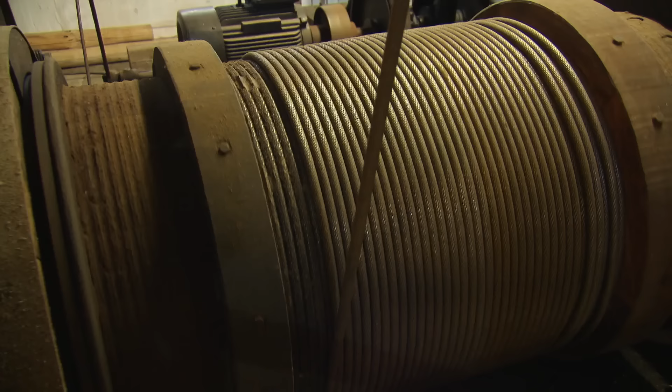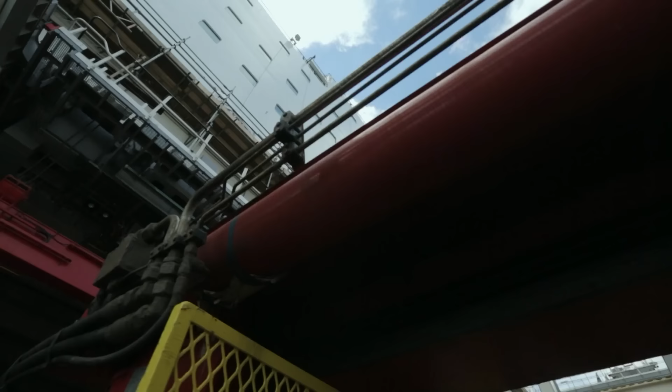In this episode, the world's biggest ship. We're the widest, we're the heaviest, we're also the longest vessel in the world. Built to be the most powerful lifting machine on the planet. Pioneering Spirit can do things that other vessels can't do. Made possible by a raft of cutting-edge inventions.

It's surprisingly strong, even though we know it's made of tissue paper. What an amazing machine, incredible. History meets high-tech to make the impossible possible.

The offshore oil industry is at a critical turning point. Many shallow water oil fields are drying up, and between now and 2050, many hundreds of rigs will be scrapped. In the old days, nobody thought of removing a platform, but the idea was to keep it at sea for years. Nowadays, from an environmental point of view, platforms have to be decommissioned.

Standard oil rigs consist of a steel base fixed to the sea floor. This supports the giant topside, holding the drill rig and the processing plant, which can alone weigh over 40,000 tons. Site coordinator Dan Ackerboom knows dismantling these metal giants is far from easy.

The conventional method always was with cranes on a big barge. Removing a platform in the old-fashioned way has a lot of disadvantages. It's mainly because you're offshore for a long time. It's a lot of lifting, and lifting is always a risk, especially at sea.

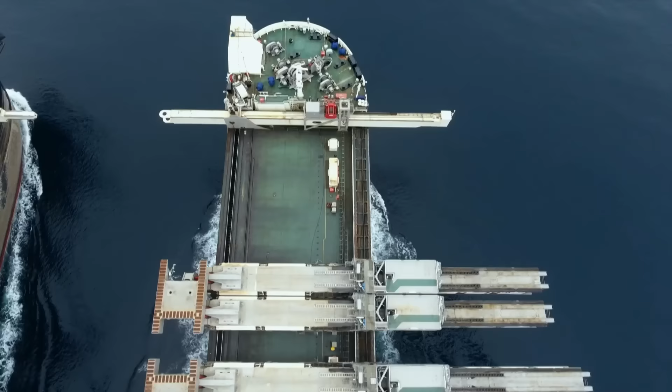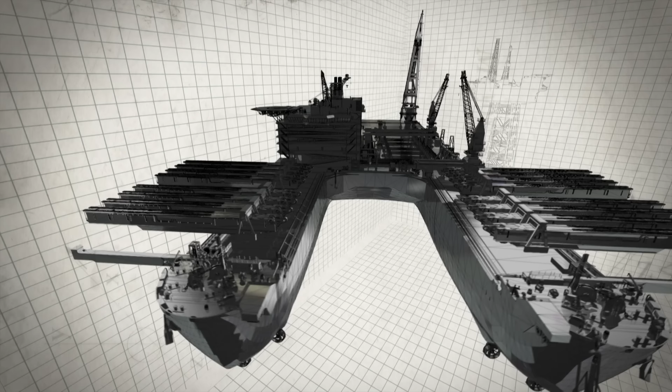And in August 2016, what offshore construction engineers came up with is the Pioneering Spirit. For Vice President of Innovations Andre Steenhuis, this $3 billion multi-purpose megaship will change the industry forever. This idea is quite revolutionary. If you have to do something which you have never done before, it's difficult.

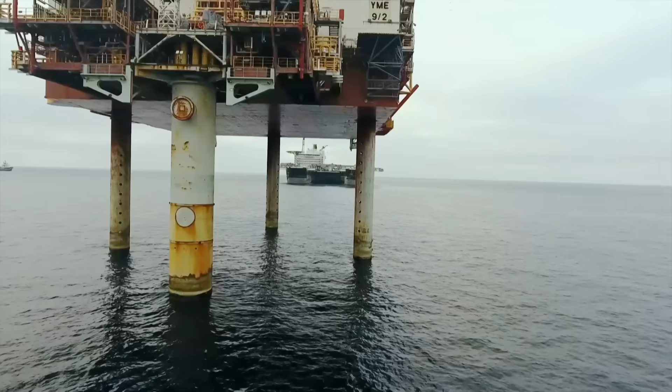Weighing over 900,000 tons at maximum draft, at 124 meters wide and up to 477 meters long with equipment deployed, this steel giant is the biggest vessel on the oceans. Propelled by 12 6,000 kilowatt azimuth thrusters, this multi-purpose ship can install and remove oil platforms and lay pipeline in the world's deepest waters. And its unique dual-bow design, with 8 pairs of lifting beams, each weighing 1,800 tons, enables the ship to straddle an oil platform and pick up a 48,000-ton oil rig topside in one Herculean lift.

Lifting something of such magnitude at sea has never been done before. For the Pioneering Spirit team, the engineering feats required were mind-boggling. It's really challenging, of course. It's something completely new, not been done before.

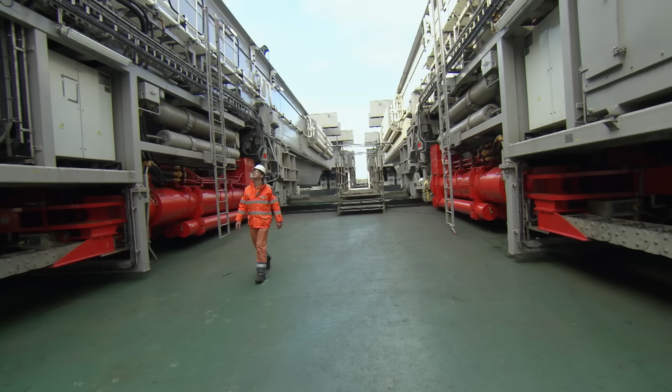But a giant lifting system requires a giant ship. And building a vessel of such great size and complexity provides an unprecedented construction challenge. The size of the vessel already makes it difficult. Almost 200,000 tons of steel you have to produce, weld, install. And on top of that, we also have various complex systems on board, which many yards are not used to.

The length, the water displacement, the width, it is a unique ship. It is bigger than all the other things it did before. So how do you build a megaship of such epic proportions that can pluck an oil rig platform from the sea?

Engineers at Allseas would look to the work of the maritime trailblazers of the past. It seems that, as far as boats are concerned, size has always mattered. And once man had mastered the basics, he was soon building big.

Ptolemy IV of Egypt's warship, the Tessarakonteres, was thought to be the world's largest human-powered vessel. At 130 meters, it was meant to be rowed by 4,000 slaves. But in practice, it wasn't very mobile.

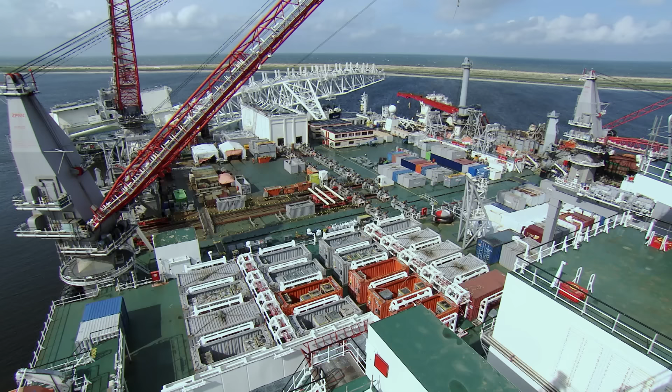Engineers on the pioneering Spirit are taking Kaiser's methods and employing them on a gargantuan scale. Built using the block method at almost 3 times the size of a Liberty ship, it is prefabrication on an unprecedented scale.

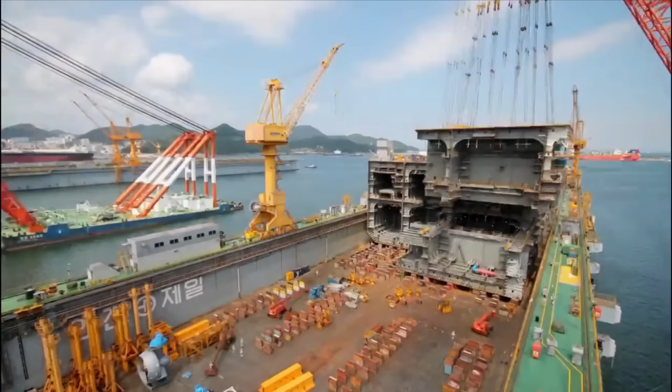A normal ship consists of 60 to 70 big blocks, but this ship almost consists of 1,000 blocks, which were then pre-assembled to pre-erection blocks, and those pre-erection blocks were dropped in a dock, and there they were welded together.

Before sailing to her home port of Rotterdam, Pioneering Spirit is constructed in the Daewoo shipyard in Korea, only one of 4 shipyards big enough for the job. The Korean shipyards are used to building big ships, but this ship was massive.

The ship's unique shape means the prefabrication method can be taken one step further. We didn't build it in one dock. We built the portside hull in a dock and the starboard hull in another floating dock, and eventually brought her together along the quayside.

She's a split hull, how we call it, because she's not really a catamaran. We need to have this shape, otherwise you can't move around different kinds of sizes of topside and connect to the topside.

Even with prefabricated units, the ship is so huge it takes 4 years to build. The amount of man hours, the amount of welding work involved in that was 2 to 3 times as much as they expected.

I have seen 8 vessels leave there, and this vessel was not even finished, basically because of the amount of steel involved. It is not really a vessel, that's what I always think. It's a big working island.

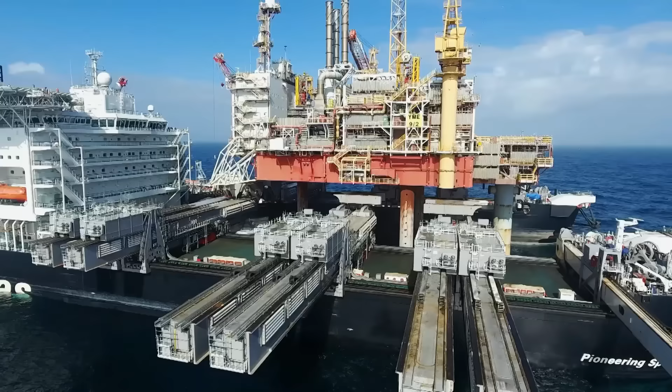Pioneering Spirit's engineers have created a unique ship. But to achieve the ambition of physically lifting a rig from the seas, designers have to draw on yet more innovations from history. It feels a bit like riding on a magic carpet, to make the impossible possible.

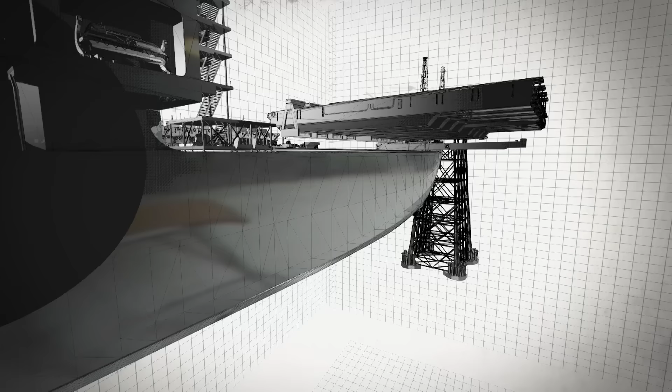Oceanic mega vessel Pioneering Spirit is at the vanguard of the offshore construction industry. Built to salvage rigs in one gigantic lift and lay pipe in the planet's deepest waters, for Vice President of Innovation Andre Steenhuis, this ship is the engineering project of a lifetime.

The capacity of this vessel is quite unique. You've got 1 million tons of displacement. The length and the width are huge. This vessel has completely changed how the traditional industry works.

The ship's unique design means it can pick up an oil rig topside in one epic lift. What we do with this concept is that we don't lift a platform from the top, but we actually push it off from the jacket.

To begin the platform lift, Pioneering Spirit must first lower cutting torches down each leg of the platform in preparation. Then the ship maneuvers into position. But this is not plain sailing. The dual bows must slide under the topside with room to spare.

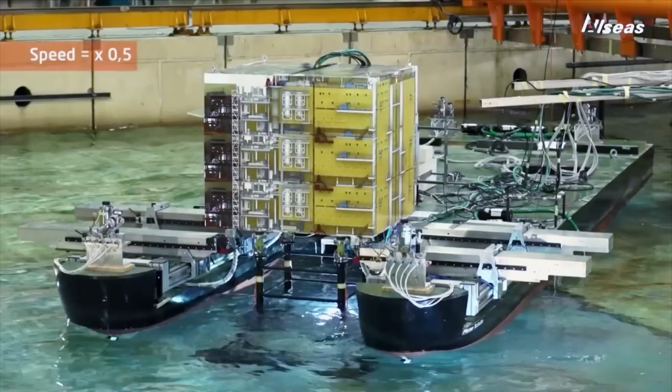We need to be able to increase or decrease the draft of this vessel to make sure we could get underneath a platform, which are all at different heights at sea.

So how do you safely position a 900,000-ton ship under an oil platform in potentially hostile waters? To achieve this, the designers need to draw on the accomplishments of history's great engineering pioneers.

Science journalist Leila Nelipour is traveling across the seas of Central America to a remote Panamanian archipelago to investigate an extraordinary engineering mystery.

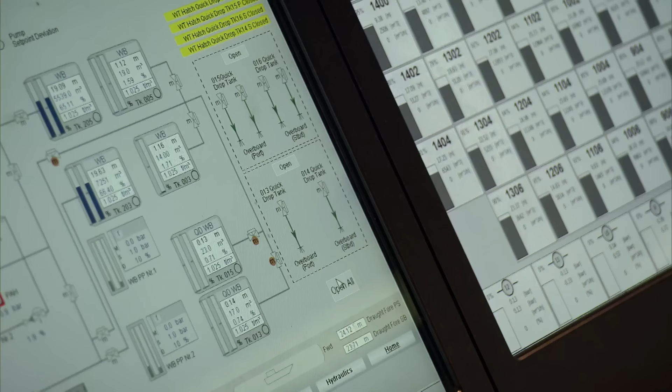Engineers on mega-vessel Pioneering Spirit upscale Kroehl's innovative use of ballast to a whole new level of sophistication. Captain Fred Recto is at the controls. We've got over 87 ballast tanks, of which 4 are quick drop tanks. The biggest single tank is already 15,700 cubic meters, which is normally the size of a big vessel. In total, we can occupy about 750,000 cubic meters of ballast water.

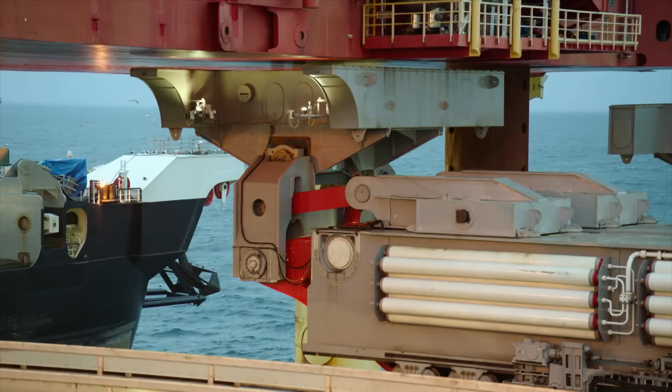To position under the rig at a safe distance, the ship takes on enough ballast to increase its draft a further 17 meters. What we don't want is once the yokes or the beams are close to the platform, that they will hit the platform.

Once in place, Pioneering Spirit can begin the lift process. First, the ship must connect a series of yokes to the platform, but this poses a dangerous problem. You have to be able to compensate for all the vessel motions when you're moving in on the platform. If you don't have that, the collision impact will be enormous and the project will finish.

So how can engineers accurately connect to the rig when the ship is constantly moving? The team on Pioneering Spirit would look to the work of the innovators of the past. This is the Linas-Montlhéry racetrack near Paris.

And this car, driven by Suzy Shi, is one of the cleverest ever built. This is the Citroën DS, a true icon of French motoring. And while she's undoubtedly a thing of absolute beauty, it's actually the engineering underneath the bodywork that makes it truly remarkable.

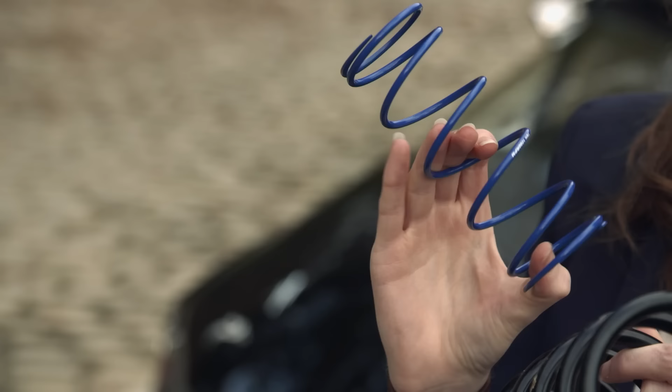And in 1955, that engineer was Citroën employee Paul Magès. His ingenuity would override conventional suspension engineering once and for all.

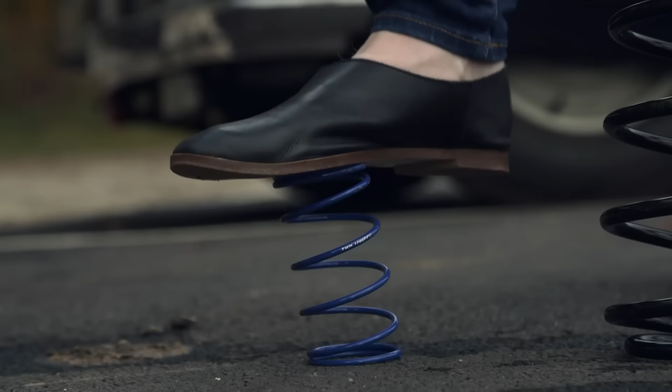Conventional suspension systems are based on springs, but because a spring always maintains the same stiffness regardless of how much you compress it, there's always a compromise to be made in handling. So if I have a soft spring like this one, it's pretty good at absorbing fast bumps and jolts in the road. But when I'm going around corners, the softness means my handling is a little bit compromised.

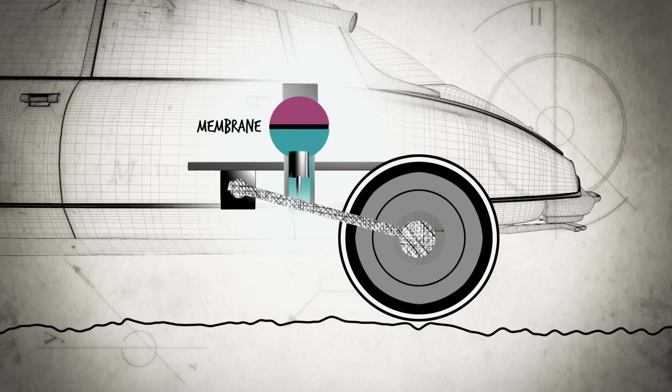If I go, though, instead for a stiffer spring like this big one here, it's not very good at absorbing bumps in the road, but it's much better through corners with handling. So essentially there's a catch-22 here. If you want a really comfy ride, your handling is going to be affected. But if handling is your top priority, then it's not going to be a very comfortable experience.

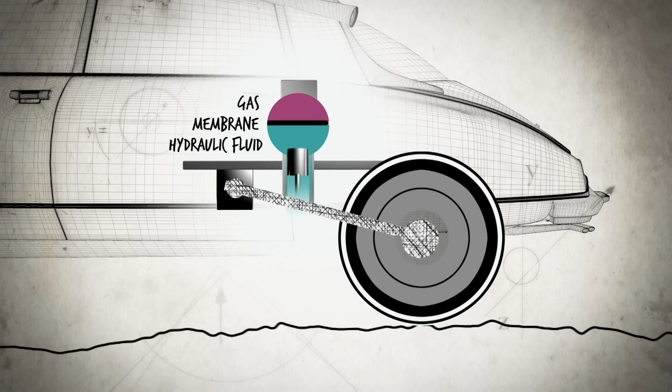Magès took a hugely innovative approach. He got rid of springs altogether. Instead, a sphere is attached to each wheel by a rod and divided by a rubber membrane. The top contains gas, which compresses and absorbs force, and the bottom hydraulic fluid, which transfers it. On impact, the rod pushes into the hydraulic fluid, transferring force to the membrane, compressing the gas above and absorbing the impact. Any excess force is dissipated by pushing the non-compressible hydraulic fluid through a valve.

So we're going to put Magès' design to the test by driving the DS on this incredibly bumpy road. Now, for most cars with a conventional suspension system, this road would be horrendous. It would be really bumpy, really shaky. So let's put the DS to the test and see how she goes.

This is really quite amazing. I mean, driving down this really bumpy road in my car or a normal car, I'd be feeling lots of jolts and bumps, but in this car I can't feel them. Because we're riding on this kind of cushion of air, it seems to absorb all of the sudden shocks and jolts from the road. So I really think Magès' system, it works.

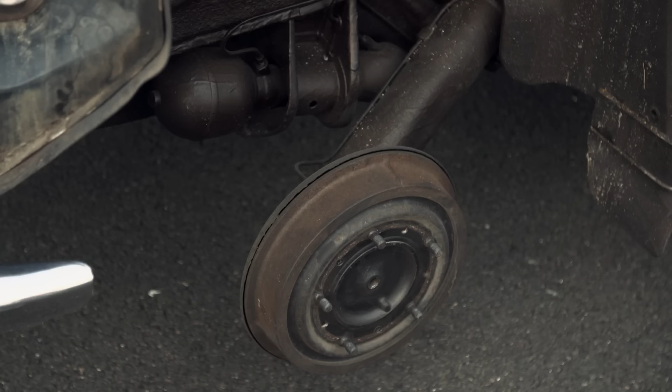Not only can it cope really well with bumps in the road, but it actually has another trick up its sleeve. It has an automatic self-leveling system, so that regardless of how much weight you put in the car or where it's placed, extra hydraulic fluid will be pumped around into the spheres, which will compensate for the weight and bring it back up to its optimal ride height. In fact, the system is so clever that it can even compensate for having a wheel missing. Absolute genius.

The Citroën DS is considered one of the most influential cars of all time. Its hydro-pneumatic suspension system has been employed on everything from Maseratis and Rolls-Royces through to ambulances.

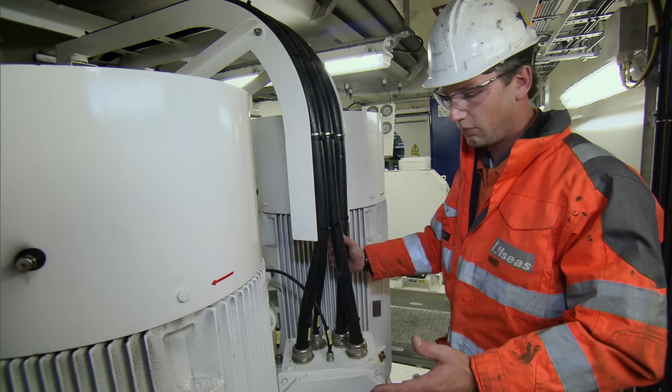Engineers on Pioneering Spirit are employing the same principles as Magès as part of a spectacular stabilizing system. When the vessel is moving around the platform and we switch on to AMC, how we call it active motion compensating.

The topside lift system consists of 16 giant beams, 8 per hull, each weighing 1,800 tons. Each beam houses cylinders containing pressurized air, separated from hydraulic fluid. Similar to Magès' spheres, the air acts as a buffer to dampen the cylinder movements. The combination of the hydraulics and the air system, what we have, that makes it actually a big and giant shock absorber. Yeah?

The hydro-pneumatics work to cushion impact of rough seas. In combination with the entire motion compensation technology, it creates a cutting-edge system. All beams can move in all 3 degrees of freedom, X, Y and Z direction. The key aspect in the whole beam system is all the hydraulics and pneumatics involved to make sure that

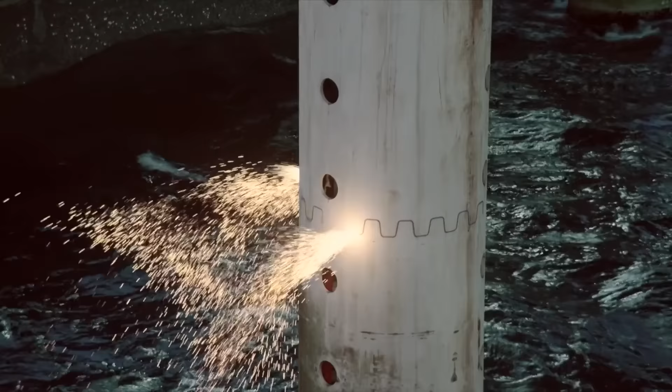To begin the epic lift, the beams are positioned in sequence under the topside. The motion compensation system is activated, and the torches inside the jacket legs cut them free. The hydraulic system is engaged, and Pioneering Spirit picks up the topside in one staggering lift. Then we simply push one button, which eventually pushes a lot of oil in a very short time through the fast lift cylinders at the front of the beam, pushing the lever up and creating more than 2 meter clearance between the topside and the legs.

So far we already have successfully lifted 13,500 tons in one lift. We can lift 48,000 tons on the bow, 25,000 tons on the stern, which is quite unique. For the whole industry, it will be a big, big game changer.

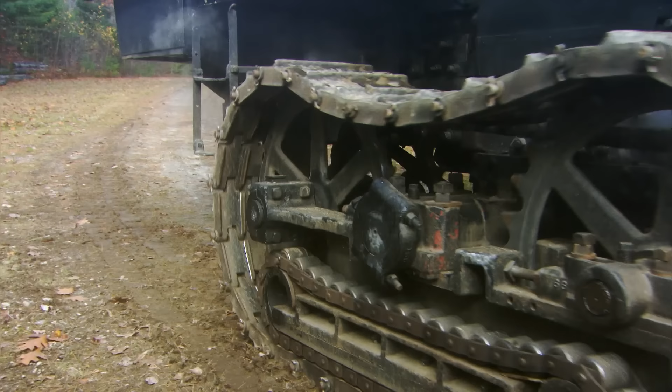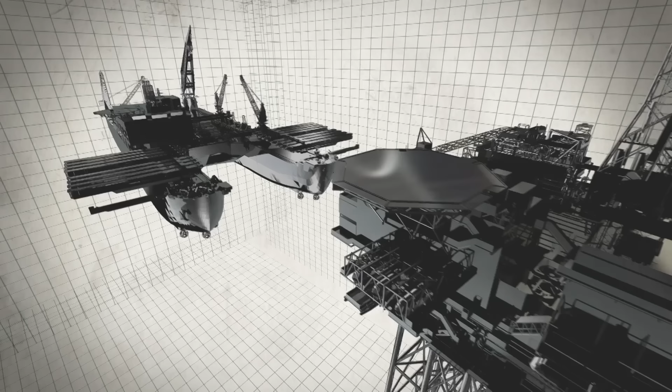But salvaging giant rigs in one lift is just part of what this groundbreaking ship can do. To conquer further deep ocean missions, Pioneering Spirit needs to draw yet more inspiration from the innovators of the past. And this was it, the Lombard steam log hauler, to make the impossible possible.

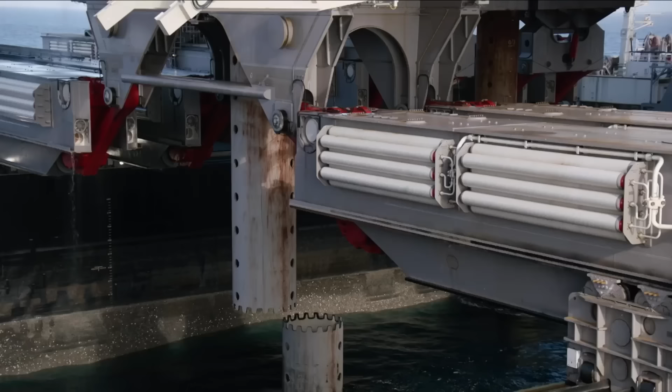Pioneering Spirit is the most innovative oil rig salvage vessel on the planet. The length of 5 jumbo jets, this metal-muscled monster can salvage rig platforms in one gargantuan lift.

For site coordinator Dan Akkerboom, it never fails to impress. We wanted to create the biggest and the heaviest lifting vessel in the world, meaning we can lift off now almost 48,000 tons.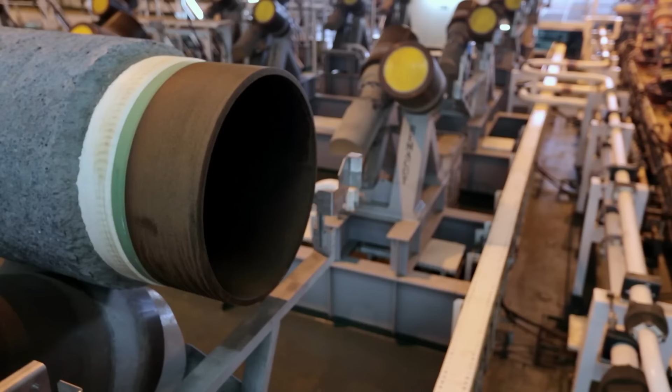Not only can it salvage rigs in one lift, but for Vice President of Innovations Andre Steenhuis, this $3 billion ship is a cutting-edge multi-purpose oil industry tool. Time is money, so we have to keep on working as long as possible. We wanted to have the double functionality on this vessel, because when you do the heavy lifting, the vessel is occupied for a very short time. And the other time, when we are waiting, we can also lay pipe.

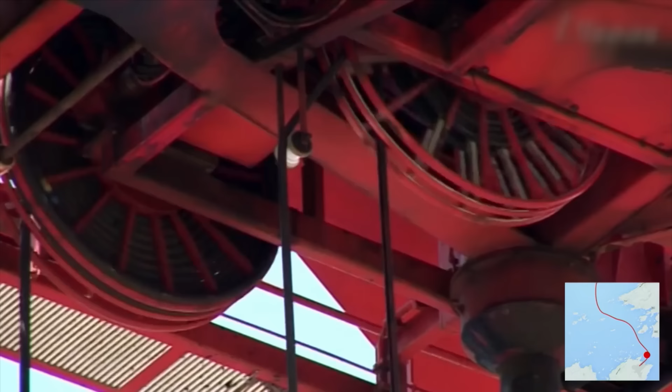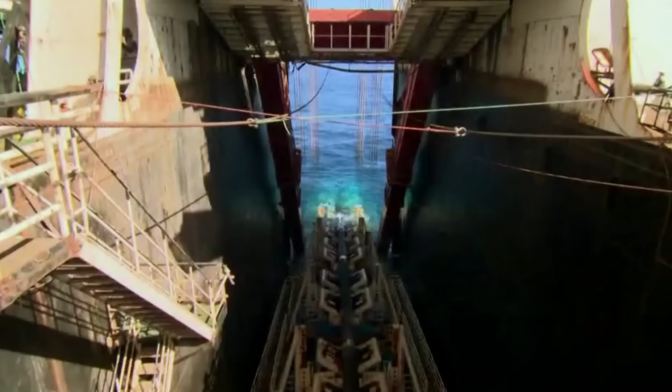Pioneering Spirit is tasked with laying the largest scale oil and gas pipe in some of the deepest waters in the world. But extreme lengths of large pipe can weigh up to 2,000 tons. Unless the pipe is held firmly and fed out with the right tension, it would buckle under its own weight.

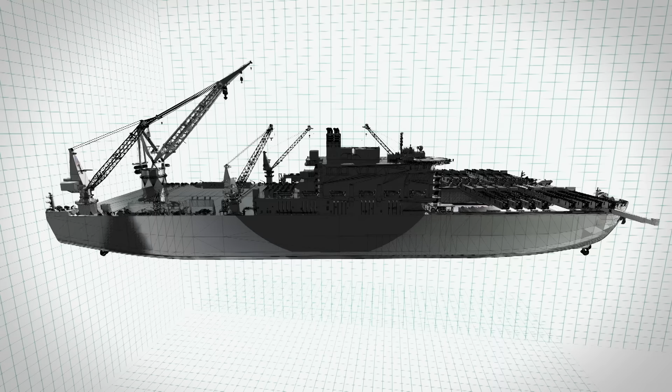We have to find another way to explore the deeper findings of oil, and therefore you need to have a vessel which has lots of capacity and possibilities to install pipelines. To lay heavy pipe in deep water is difficult. So how do you control heavy pipe lay in deep and difficult water? For engineers on the Pioneering Spirit, the solution would lie with a groundbreaking innovation of the past.

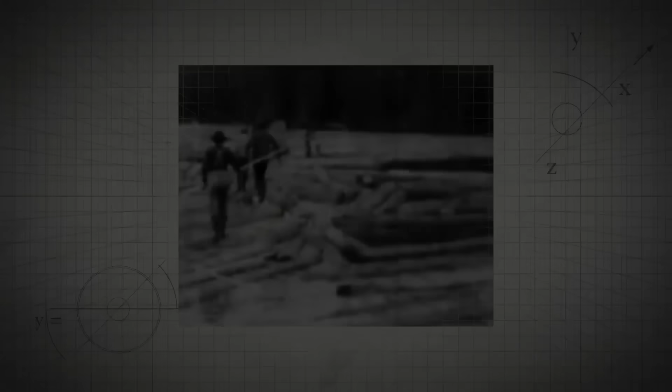Roughly 90% of Maine is forest, more than any other state in the US. Mechanical engineer Michael Tobias has come to the pine tree state of Maine to discover how the logging industry inspired a revolutionary design.

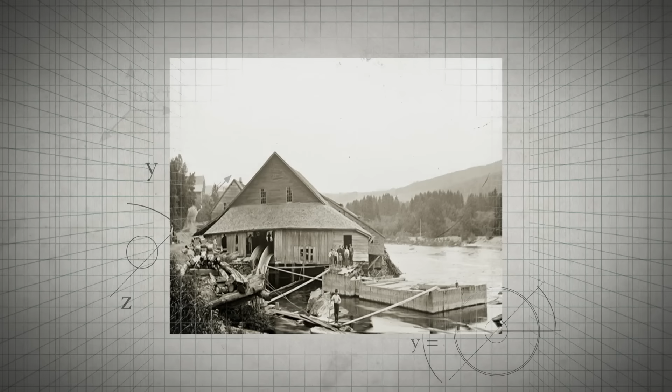As far back as the early European settlers, these timbers have been used as a valuable source of income. Loggers would fell the trees closest to the river first, and log drivers would use the current to ride the trees down the river to the sawmills built along the banks.

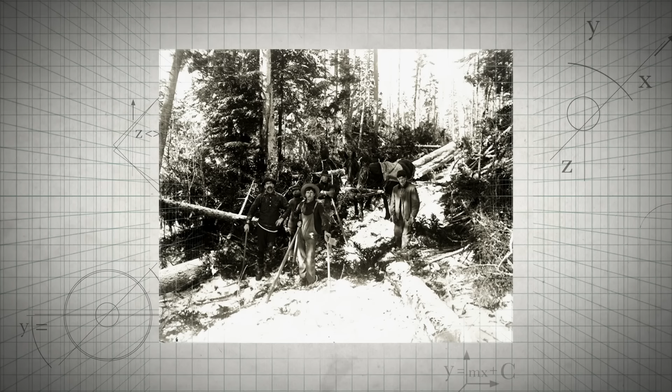However, once the trees closest to the banks were chopped down, a problem started to arise. Pulling heavy timber from the deeper forest on traditional carts was impossible, as cart wheels would get bogged down in mud and winter snows. With thousands of acres of forest being rendered untouchable, a solution had to be found, and quickly.

In 1901, inventor and lumberjack Alvin Lombard, who'd experienced the problem firsthand, was set the challenge.

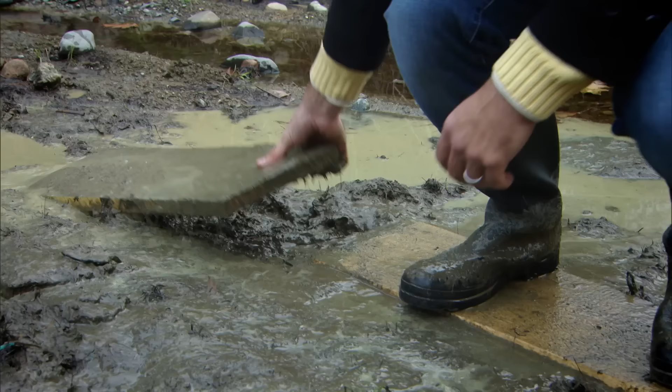We can demonstrate the issue Lombard faced with some boots and some good old Maine mud. As I step onto the mud, I slip and I sink. A lot of weight is resting on a small amount of surface area. To overcome this, I need to spread my weight on a larger surface area, keeping myself afloat. And when I get the piece from behind me and lay it down in front of me, I'm able to continue moving forward with evenly distributed weight.

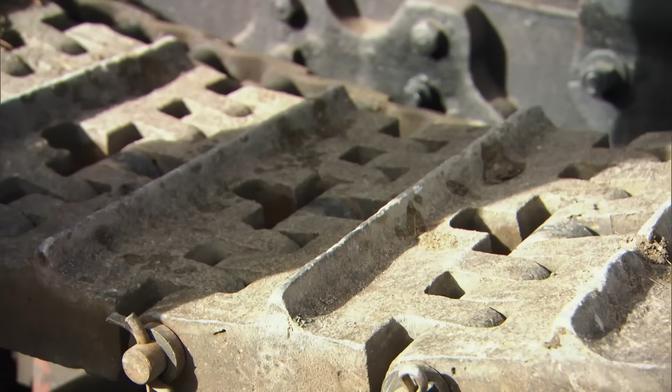Taking this concept, Lombard came up with a machine that would change the industry and the world forever. And this was it, the Lombard steam log hauler. What an amazing machine, incredible.

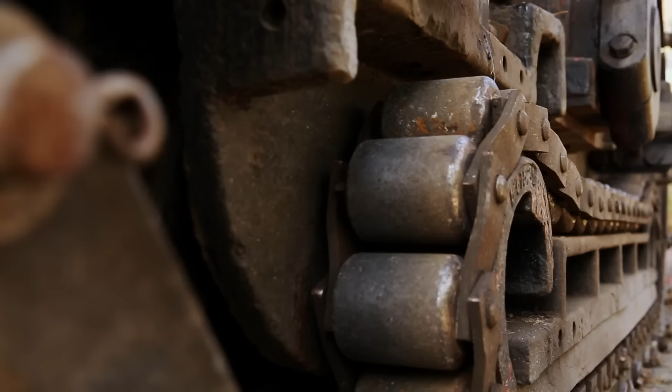And the secret of its success lies beneath the machine itself. The genius of Lombard's design is its continuous tracks, spreading the vehicle's weight across the ground and providing even traction. It effectively lays its own roadway. No longer having to rely on wheels, the continuous tracks of Lombard's machine made it an instant success.

The Lombard would typically tow 8 sleds laden with lumber, weighing in at a massive 300 tons. Able to be used all year round, it was the first commercially successful continuous tracked vehicle. Lombard's design was a stroke of genius, and this machine would revolutionize the way engineers around the globe would design and build vehicles for agriculture, construction, and military use. What an incredibly engineered machine.

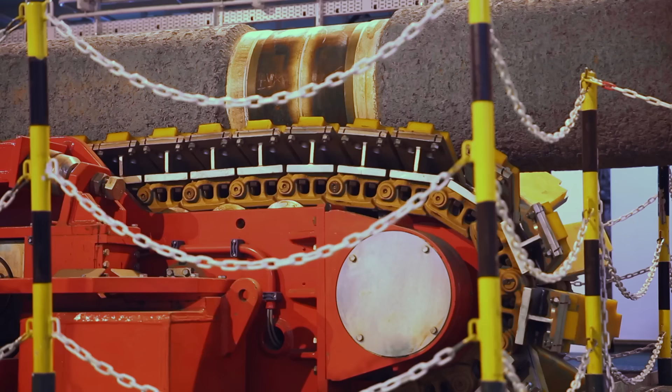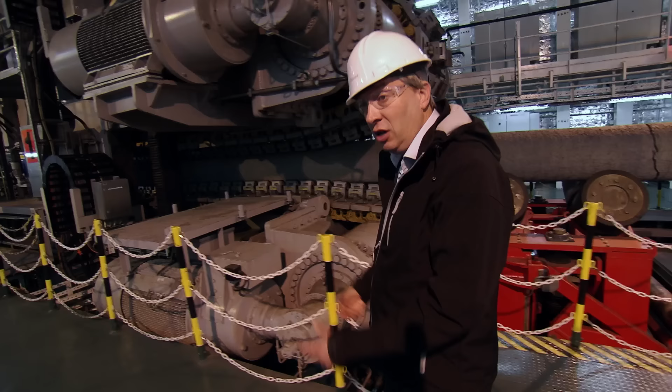But how does an all-terrain log hauler relate to a giant offshore construction ship? On Pioneering Spirit, 4 gigantic tensioners in the ship's firing line are each fitted with 100 meters of continuous track. Just like Lombard's log hauler, the tracks increase the surface area in contact with the pipe, evenly distributing tension, enabling a controlled delivery to the ocean floor.

Here we are at the aft of the production line, and here you can see one of the 4 tensioners which we have from the Pioneering Spirit. One of the tensioners can have a capacity of 500 tons.

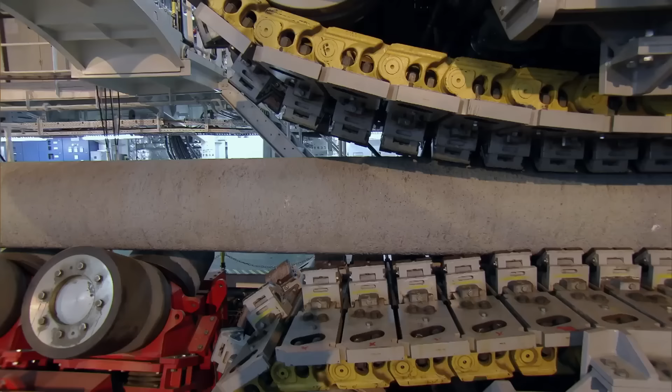The pipe is clamped in between tensioner shoes. Shoes can move a little bit, so they've got the optimum position, so they've got the optimum pressure on the pipe, so you don't damage it. The straps on the pipe hold the pipe continuously on the vessel.

The tensioners play a crucial role in the onboard pipe assembly line, where the joints are welded together at different stations. The welding platforms where the guys are standing on are moving along with the pipe during production. Engineers on the ship are able to produce 400 meters of large gauge pipe every hour.

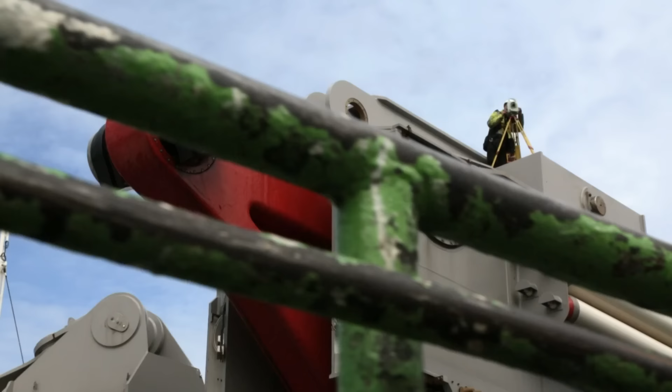Once welded, the megaton pipe is gripped by the tensioners. It's then fed continuously out over a giant stinger to the sea floor. Because we have these tensioners, we can lay deeper pipes. We have less environmental issues with the pipe. There's no sea in the world where the Pioneering Spirit cannot lay a pipe.

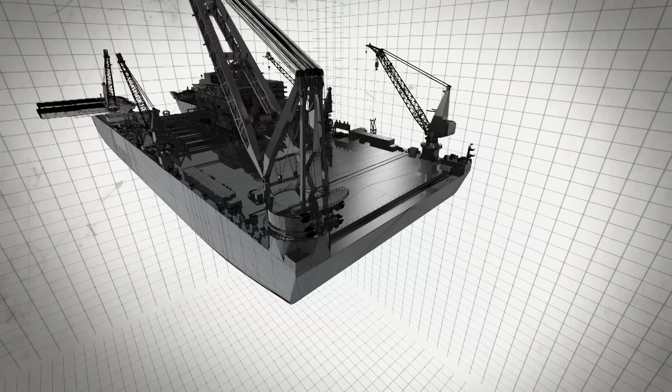Pioneering Spirit is pushing the boundaries of deep sea oil exploration. But to complete this incomparable vessel, engineers would once more need to draw upon history's greatest innovators. It really worked. I mean, it's surprisingly strong. To achieve even more impossible engineering.

Pioneering Spirit is a 3 billion dollar ocean colossus. At its deepest draft, it reaches a world record displacement of 1 million tons of seawater, making it the heaviest floating object on Earth. There's nothing in the world ever built like the Pioneering Spirit. She's unique in size, in weight, and in operation.

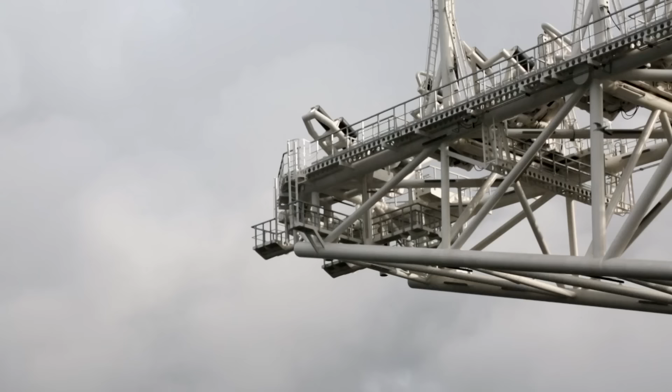This epic vessel's mission is to clear redundant oil rigs from the high seas, which it does in a unique and innovative way. We can go underneath the platform and make sure that we position the beams underneath the platform and then are ready to lift her off the jacket.

This mighty ship is also designed to lay the world's largest gauge oil and gas pipes for a new generation of deep water rigs. But pipe laying can take many months, and the environment is unpredictable. You have to go more out in the deeper waters, so you're much more exposed to difficult weather conditions.

Violent storms in exposed seas pose a threat to even this marine colossus, as site coordinator Dan Akeboom knows only too well. If the weather changes or suddenly big waves come, they have to stop and abandon the whole operation. But how do you safely stop and disengage hundreds of tons of pipe onto the ocean floor over a mile down in a raging sea?

To overcome this problem, engineers would need to turn to the innovators of the past.

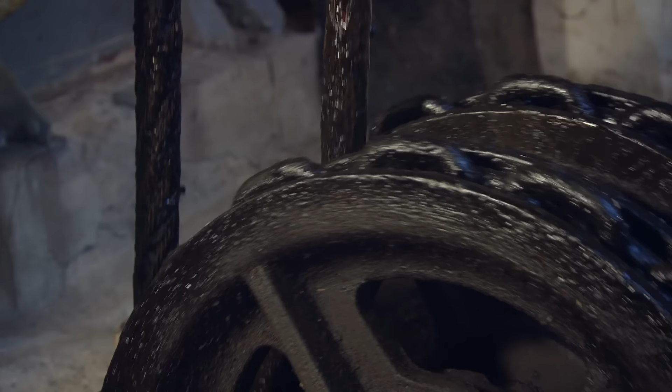Originally, the buckets were lifted with hemp fibre ropes. But in these damp conditions, the moisture would cause ropes to disintegrate, so instead they used chains. But chains weren't much better in terms of safety, because a single weak link could cause a catastrophic failure with no warning.

In 1834, mining engineer Wilhelm Albert began working on a new system, which we can demonstrate using tissue paper. Albert determined that there were a few key factors as to why chains were breaking.

He realised that if you load a chain again and again, eventually the metal will become fatigued and that will reduce its tensile strength. And breaks in the chain are more likely to happen where there's joins and links. All it takes is a single point breakage for the whole system to fail.

Oh, it just completely failed. This is incredibly dangerous. I mean, you can imagine 1,000 pounds of silver ore crashing down on your head.

After experimenting with chains for a while, Albert realised that he needed an entirely new solution. And what he came up with was simple, but ingenious.

Albert's idea was to take 4 individual strands of wire and then twist them together to form a helix. He'd then take 3 of those and twist those together to make it even stronger. So this made a kind of wire rope, and you can tell already it seems much stronger and it should be able to take a much heavier load. So let's try it out.

And here I have an original piece of wire rope, and you can see that it's made up of individual strands, just like the demonstration. Albert rope, named after its inventor, was so successful that he soon installed it in mine shafts all across this region. In fact, wire rope caught on all across the globe, and not just in mines. You can see versions of it in the modern world, from suspension bridges to cable cars.

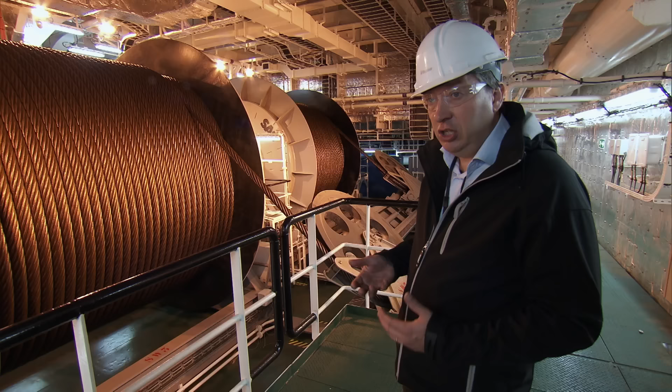Aboard the ocean giant Pioneering Spirit, Wilhelm Albert's wire rope has been used on a colossal scale as part of a deep-sea abandon and recovery, or A&R system. When you are installing a pipeline and you're midway and the weather's picking up, bad weather or even a hurricane, you have to abandon the pipe.

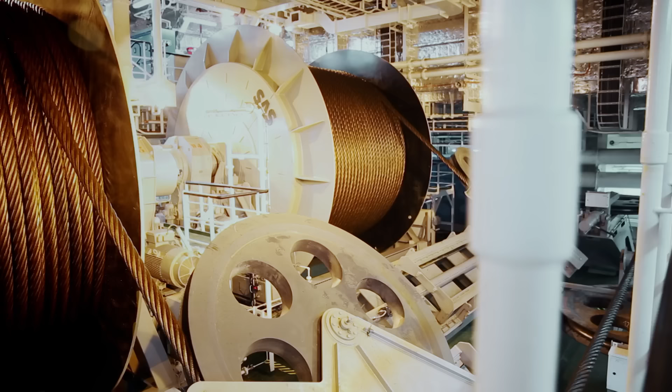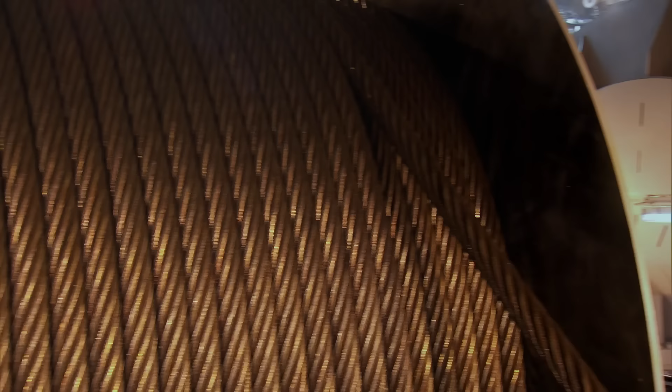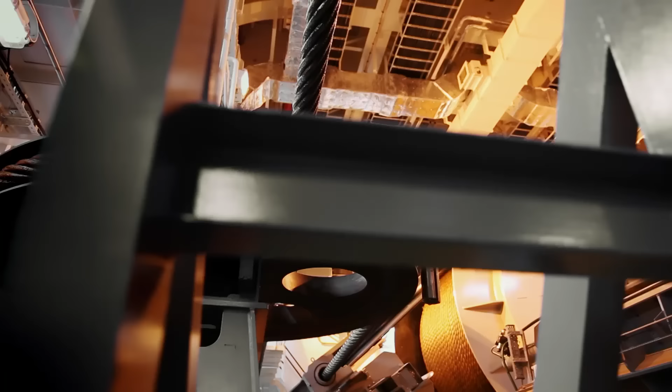This is the cable, 5-inch cable, it's quite big, and 4,850 meters in length, able to lay down the pipe with 500 tons each, so a total of 2,000 tons of lay-down capacity. This system looks very large, but it has to act very precise.

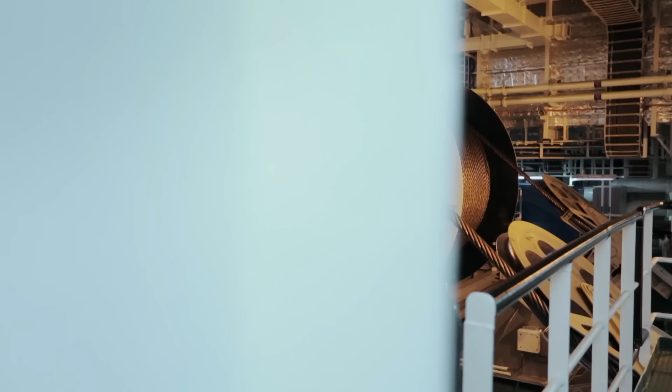To achieve that precision and control, engineers on Pioneering Spirit have created an ambitious system. Our A&R system has 4 of these winches. These are the biggest winches you can buy. For the biggest pipelines, you need all 4 of them. And to ensure accuracy when using all 4 giant winches, engineers have built in a fail-safe design.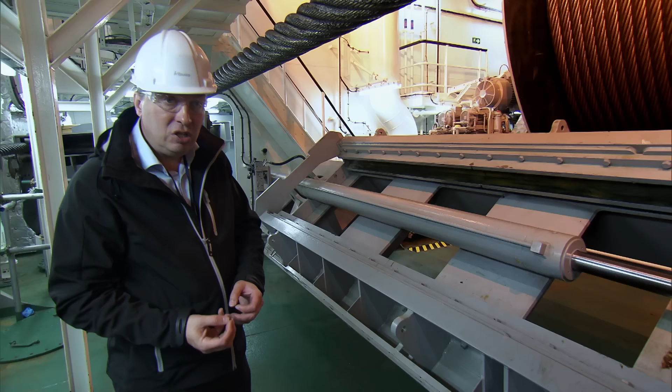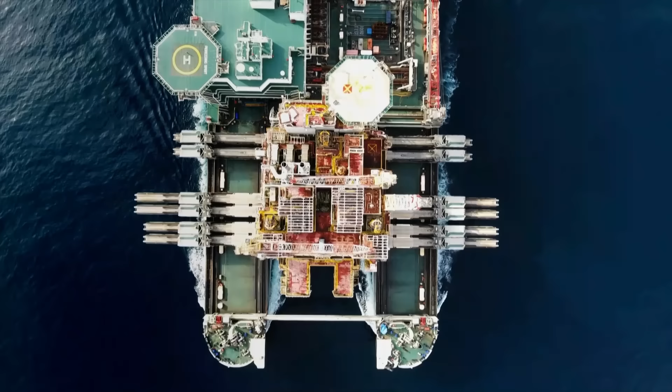Here I've got a right-handed cable, so you can see the helix is going up to the right. And on the other side of the vessel, we have 2 of these winches, they are left-handed, so the helix is going the other way. The left and right helix mean the cables cannot intertwine. We can play with the tensions and rotate the cable so we can connect it to the pipeline. This is unique to the world and to the Pioneering Spirit.

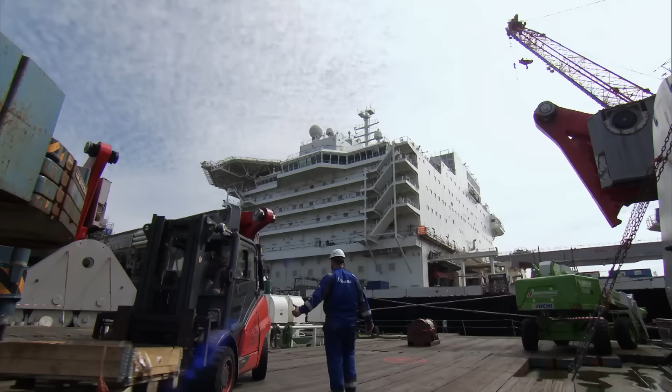Through design and engineering, Pioneering Spirit has raised the bar for what is possible for the oil industry. We can lift over 48,000 tons. We're twice as big as the second biggest pipe layer in the world, so we create our own jobs.

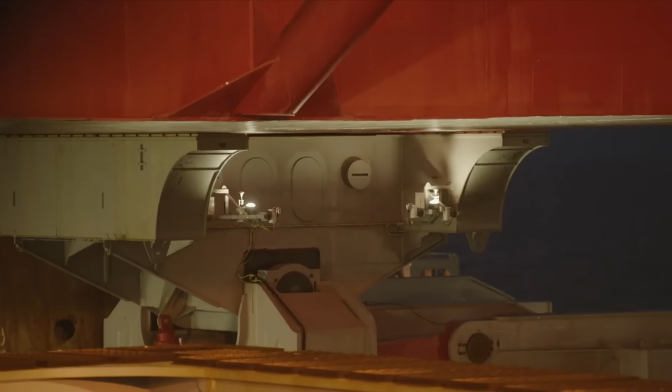If you're an engineer, this is a dream of everybody, to be involved in this project. To be involved in the development, designing and building of a vessel like this is very unique. You never get a chance to make something which changes the industry.

By drawing from the innovators of the past, adapting their ideas and making trailblazing discoveries of their own, the engineers and designers behind Pioneering Spirit have succeeded in making the impossible possible.

People ask me, oh, what are you going to do afterwards? And I don't know. I mean, we built the biggest ship in the world, so what's next? I don't know.